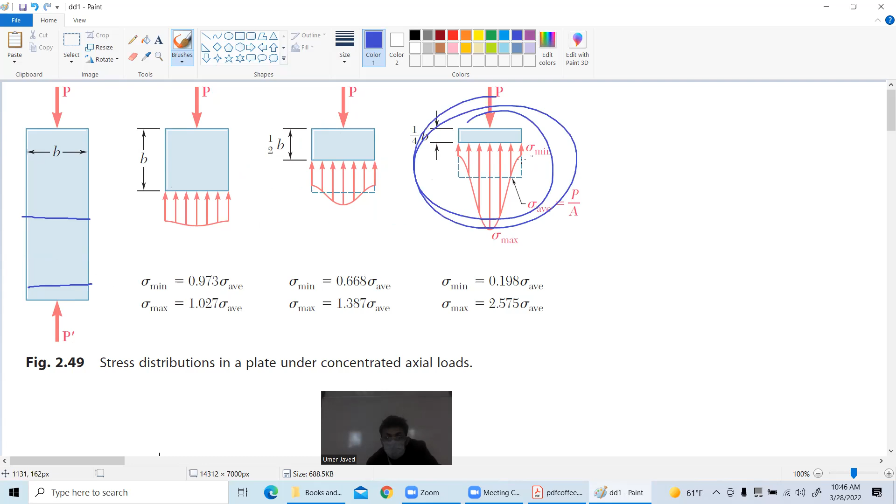Okay, what if I make a cut here? The same behavior as this starts to appear, because again you're near to the load. What happens if I make a cut here? Yeah, of course this behavior appears, because again you are very near to the load. And what happens if I make a cut here? Again this behavior starts to appear. This means you cannot just say every stress is equal to P by A and finish the story. No, you're talking about that when you are way away from the point of application of load.

This story was told to us by this gentleman, Saint Venant, back in the 1700s. Yes, that's the French pronunciation, which I am not very good at. Saint Venant. Did I say it right?

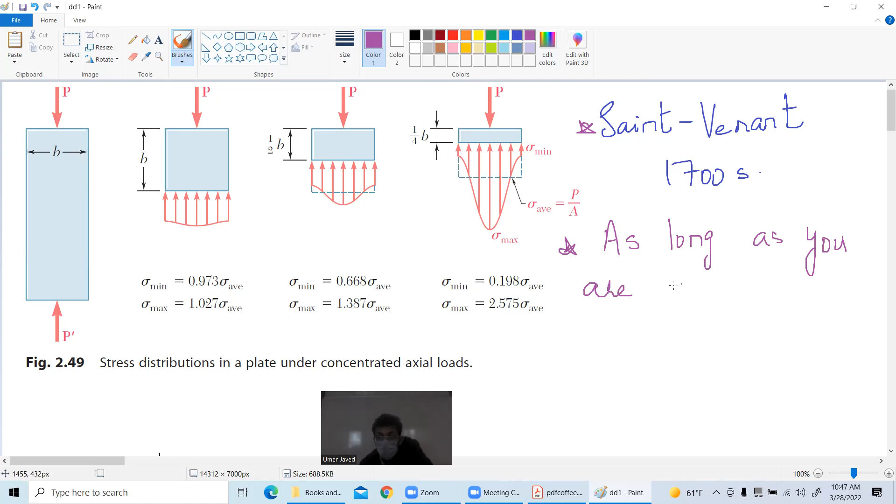Almost, okay. Anyways, so this gentleman told us this story that average stress is equal to P by A, and all of this is true when you are way away from the point of application of load. In fact, as long as we are away from the point of application of force, or change of area or material, life is good. Average stress is equal to P by A. Life is beautiful.

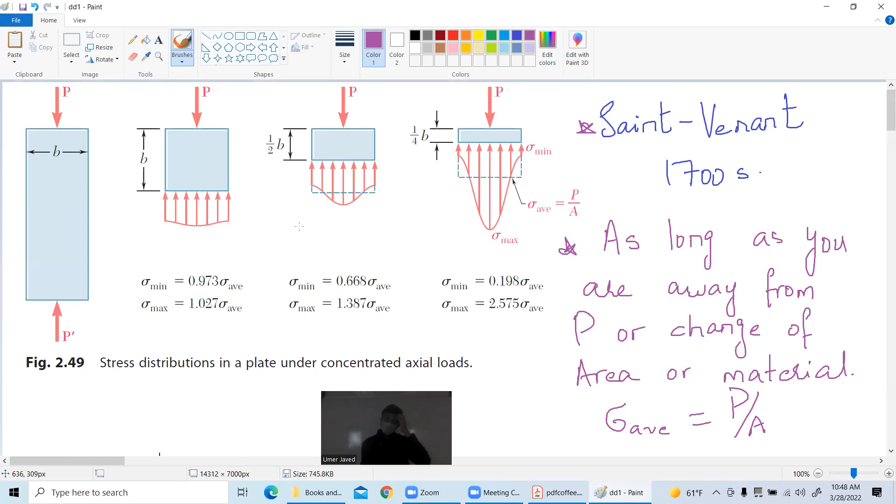You know why? Because the stress is actually way higher than what you were predicting. So if you're talking about a structure with a hole, you need to be careful. Your immediate question will be: so why don't you tell us what the stress actually is? If this gives me a wrong estimate, what should I do when talking about stress in this zone?

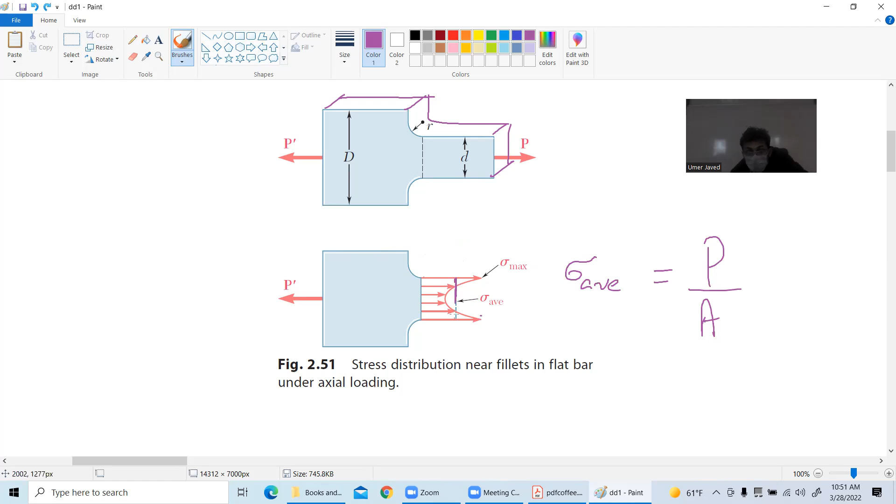And even if you were predicting that the average stress at this section will be P by A, and were feeling very happy, your structure can technically fail. You did not know that this is predicting only the average stress, where individual stress lines actually exceed that prediction. Are you following me? Sure, okay good.

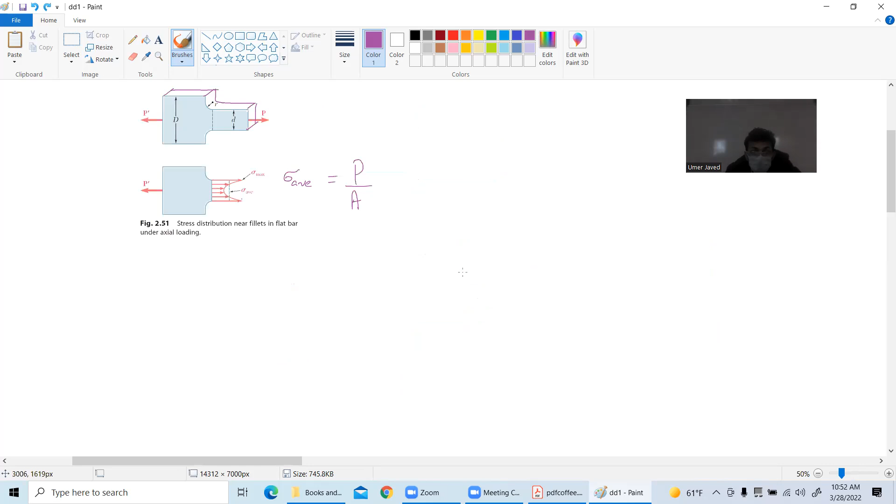Do I have any more diagrams for you, by the way? Oh, I don't, that's not good. So this is not good, no more diagrams for you. Give me one second please, let me make one more. I really want to add one more nice story to the picture, and that is, hang on for a second.

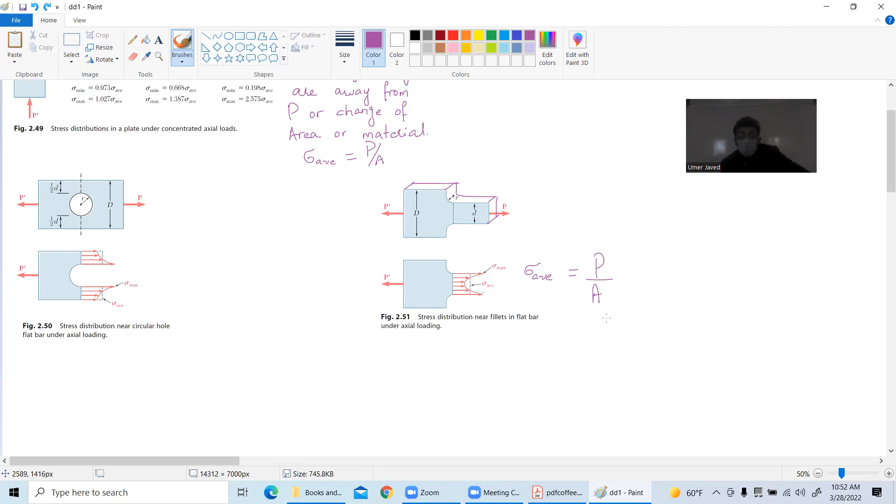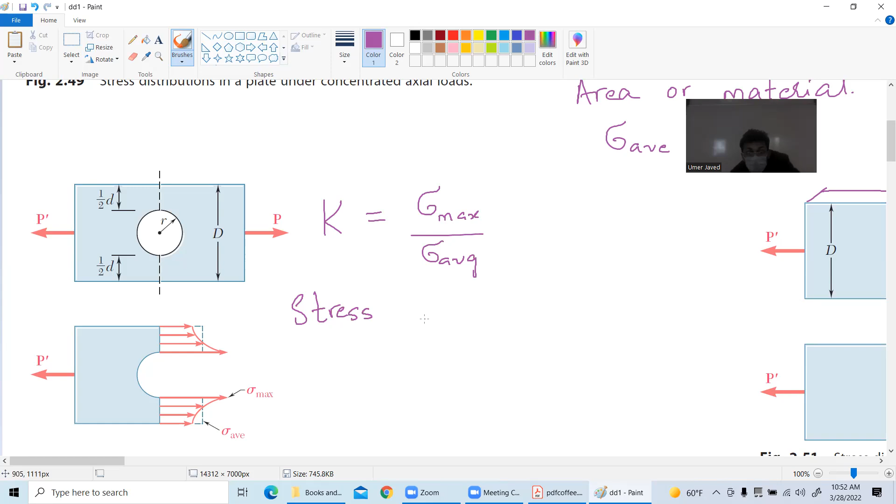Okay, anyways. Now what is the answer to all of this? Let me zoom in a little bit. The answer is K equal to stress max over stress average. This is our stress concentration factor. In fact, I'm using the word concentration, why don't I try to tell you one thing?

You need to give me one minute. So you can assume it like this: you had nice and beautiful stress lines, or stress flow lines if you want to call it, and all of them squeezed in through this little space. So they are being concentrated through that little area. Hence the term stress concentration factor.

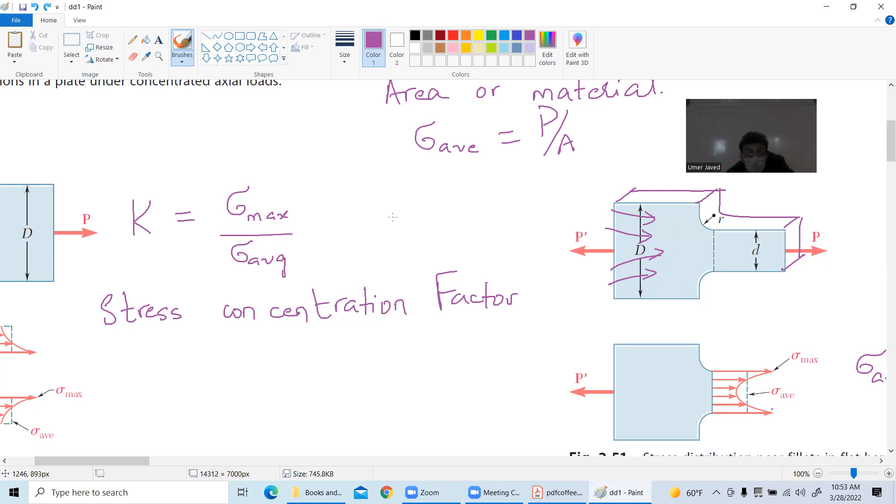So let me tell you how we would proceed. What we will do is use some already present charts that are present in our textbooks. Now, usually such charts are empirical, that is experimental. You have a flat bar like this, and you have a hole here, and you are putting a load here.

What you will be doing is using the same formula: K is equal to stress max over stress average. Stress average, you already know — you've been doing the drill for the last 3 weeks. Average stress is equal to force per unit area. That's the easy part. But now we cannot proceed any further because you actually don't know how the individual stress lines are behaving as they go past or close to that hole, right?

Empirically, you have this line. This is what you will be doing: you will open the required chart. You will look at this 2r over d, right? You have the radius of the hole. You have dia of — I'm sorry, d means this dimension.

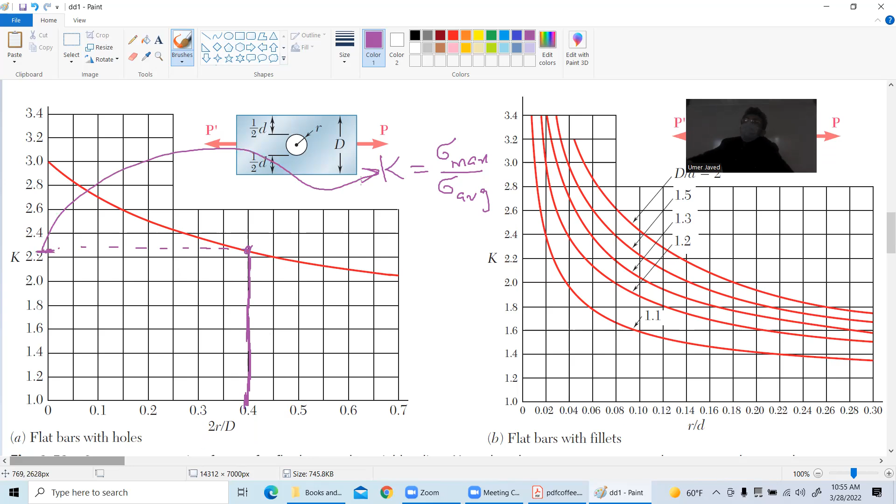So you can think of it like this. Hang on, you have this flat plate and a wooden object that goes right through it, and I am holding that wooden piece and pulling this object. Are you getting my point? So I have this wooden piece, let's say this is my rectangular structure. This is the hole. Somebody placed a wooden piece through it, and now I'm pulling it.

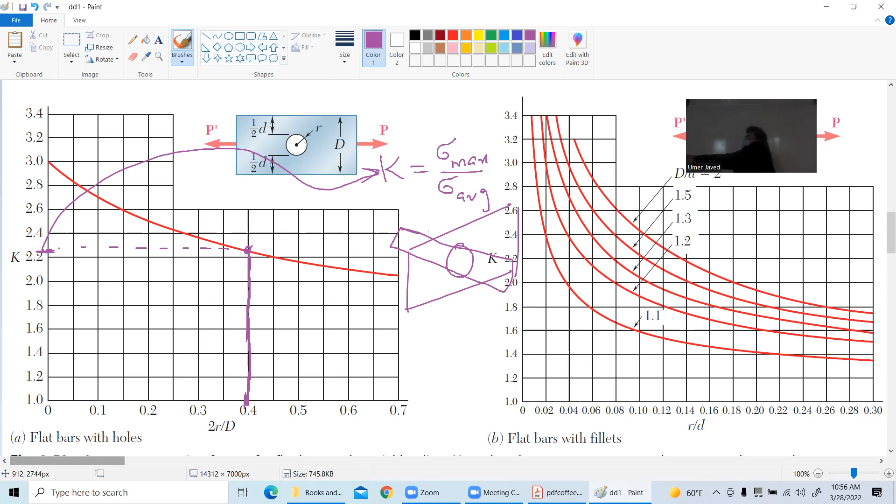So now the fact that this wooden piece goes through the hole, and you have a hole in the structure, that adds to the picture of this stress story. So I have to be using this drawing. I will be doing an example.

Just give me a few more seconds.

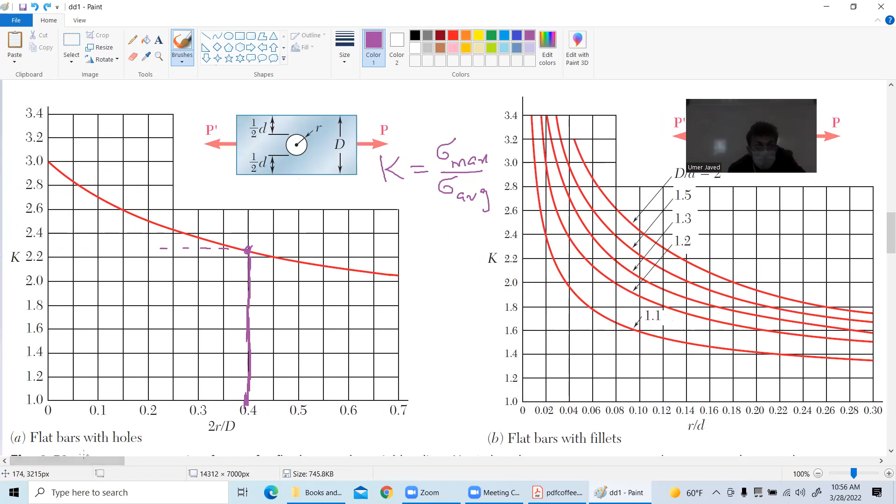Similarly, you have another of these diagrams. This one is again for an object in which you have area that is changing.

Now many students are asking, what about this fillet radius? We know from childhood experience that if you have a piece of paper with a sharp corner, a little force will immediately tear it apart. But if you have a nice radius to the same piece of paper, you'll need a little more force. So this fillet radius actually adds to the complete picture.

You will find r over d, you get your particular value, then you have capital D over small d. Let's say that value is 1.5. You will follow the second curve and arrive here, then go horizontal, and it will give you a beautiful value of K. You substitute here, this you already know, and you calculate stress max. So this is the procedure we will follow in this class.

I will be making an example. If you have any questions, you need to stop me now.

If I'm close to the point of application of load, I need to be careful. The individual stress line will be higher than the average I used to talk about. If there is an area that is changing, I need to be careful. The individual stress line will be higher than the average stress I used to talk about. If the material is changing, I have to be careful.

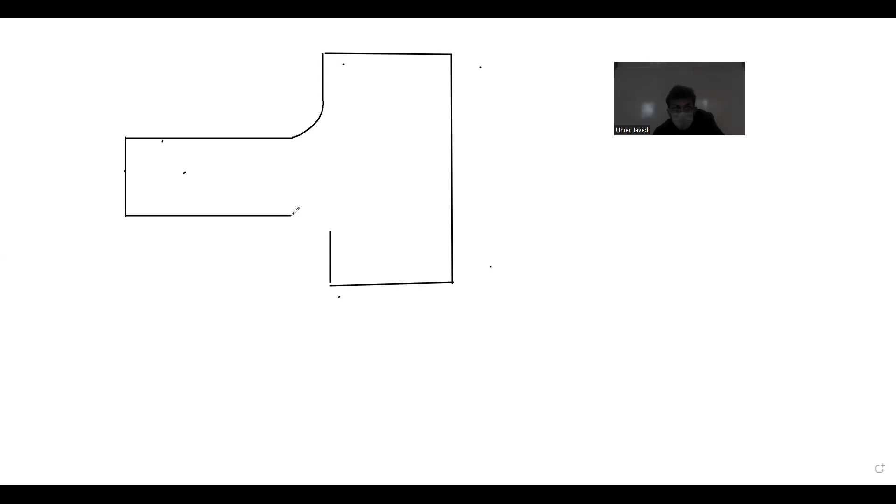Are they involved in the book? Oh, these charts are available in the book. I actually copied them from Beer Johnston. In fact, I can show you right now after a few minutes.

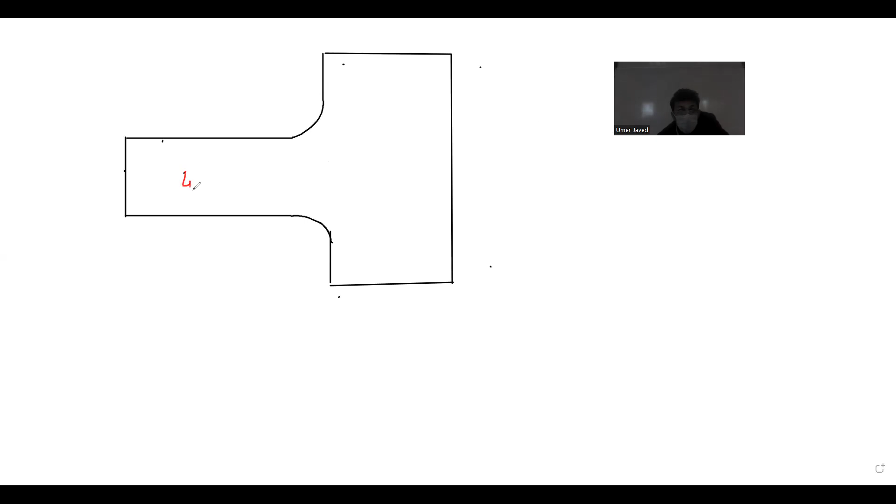Okay, the question says that this nice dimension is 40 millimeter. Beautiful. Okay, life is good. This dimension is 60 millimeter.

And you're definitely doing it. This dimension is 8 millimeter. Nice, the radius.

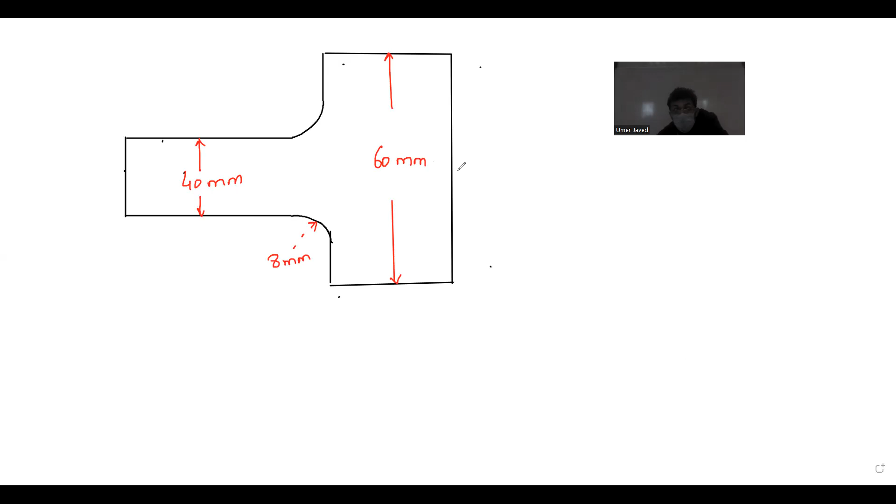The question says that I have a load being applied in this direction, P. Of course, my statics tells me that you are holding it from here or putting a load, whatever. So this should be P.

The question goes and says that you have a depth of 10 millimeter. Wow, 10 millimeter, right or wrong? How many agree, how many disagree? The question says that you have to tell me.

Okay, now I think I have to redraw. I think the load is being applied here. This is a 3-dimensional drawing. Define, okay.

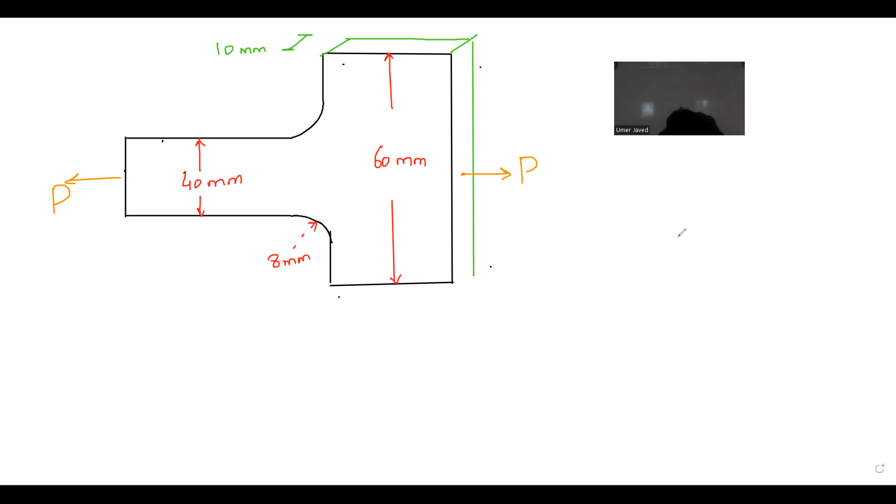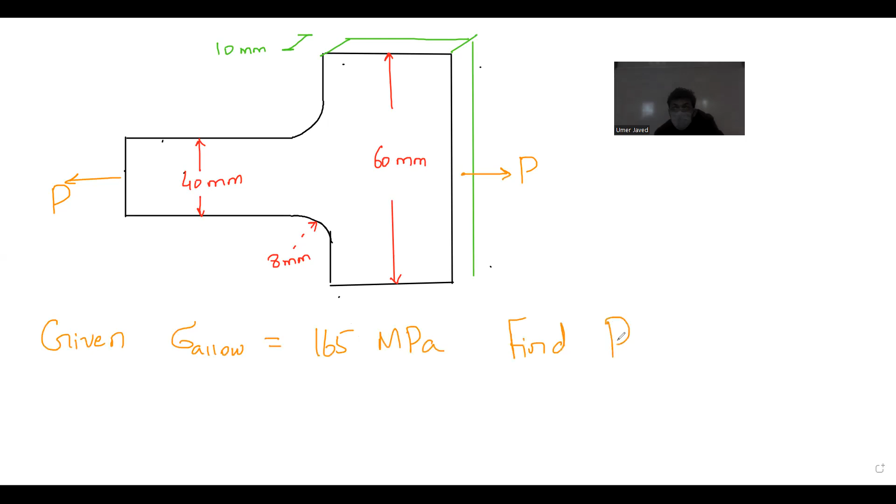Given that the allowable stress is 165 megapascals, you need to tell me P. Okay, hang on for a second. Given the allowable stress is 165 megapascals, then you have to give me the P, the load.

Now you have to be a little careful, because the cross-sectional area has changed, right? So you remember those individual stress flow lines? They are the ones that I am worried about. They might exceed that 165 megapascal and your structure might fail.

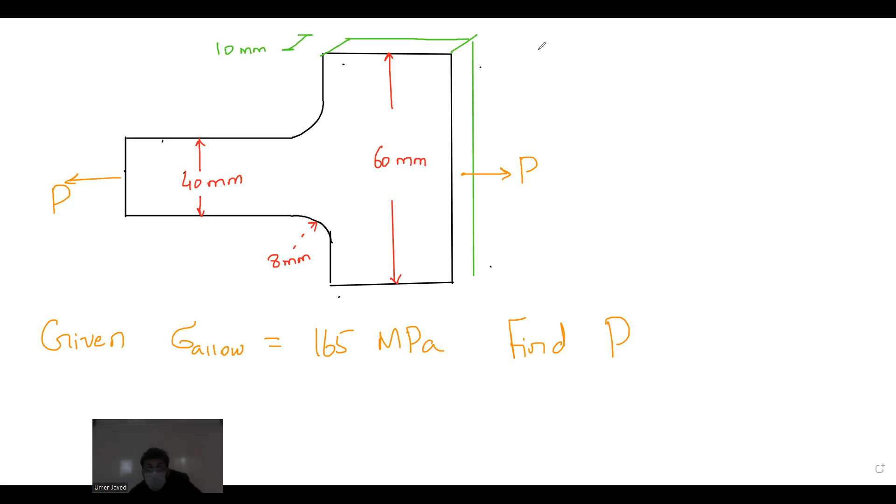So what is the first step if this question shows up in your exam? I will write K equal to stress max over stress average. Second step, stress average equal to P by area.

And by the way, I have to be a little careful. Please don't lose sight of the fact that what is this dimension? 10, right? Are you getting my point? Just because I did not draw does not mean that it's not there. So it's like 10 millimeter, 10 millimeter.

Third, give me the K from the chart. Fourth, give me the stress max. Okay, you can take 60 seconds. Just take a picture of this as soon as possible so that I open the paint chart and everyone of our online students and in class can.

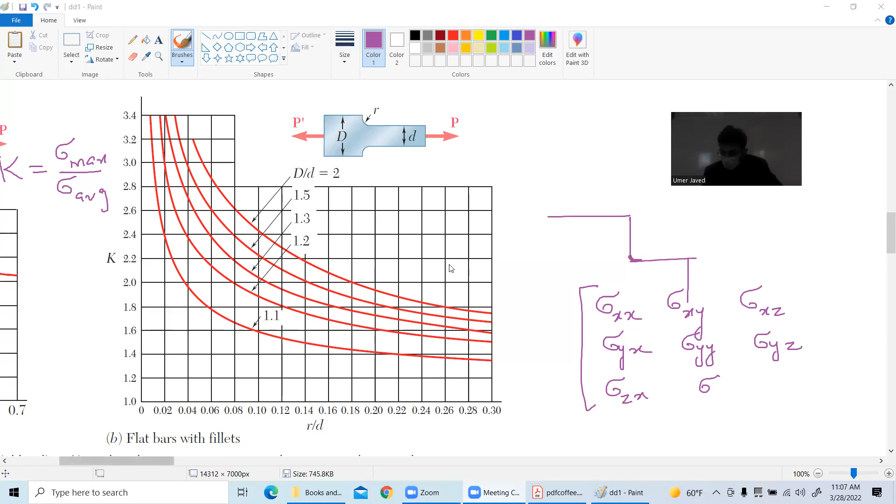Okay, I will go back actually. 6, 5, 4, 3, 2, 1. First thing is, why don't you tell me average stress?

Anyone who found the value? Did I give you the value of P? Oh sorry, okay. So it is P divided by, so what is the area?

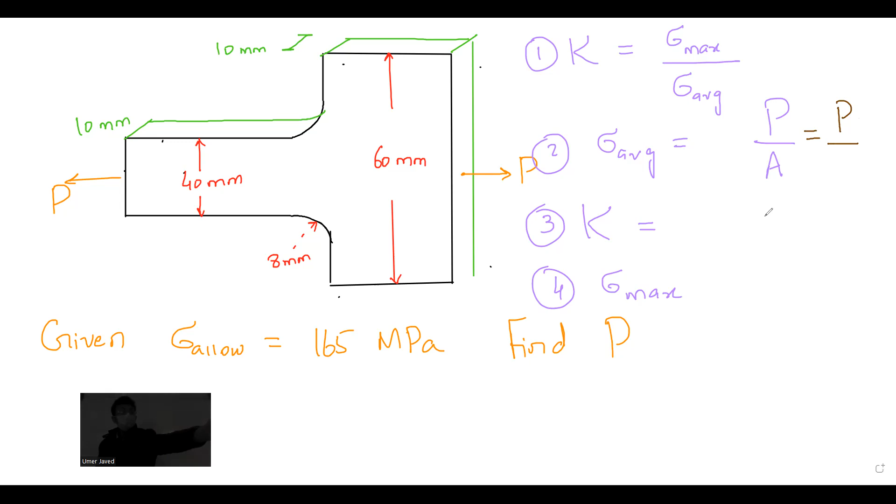Exactly, so you have to tell me which area. Allowable stress means what? Allowable? So allowable stress equal to 165 megapascal means that if the allowable stress exceeds 165, then the structure can get into danger. And for me, this allowable also holds true for the individual stress line.

So if there is one line that is exceeding 165 megapascal, doesn't matter, that's basically maximum stress, right? Exactly, so my maximum line should not cross 165. So the average will be allowable stress, right? Average stress, because we are talking about...

No, I will tell you. So I will have average stress is equal to P by A. And this is equal to stress max over K, right?

Okay, now the area is, what is area? Area will be this one, 10 millimeter by 40 millimeter. So I have stress average is equal to P by A, with area equal to 40 into 10 power minus 3, into 10 power minus 3.

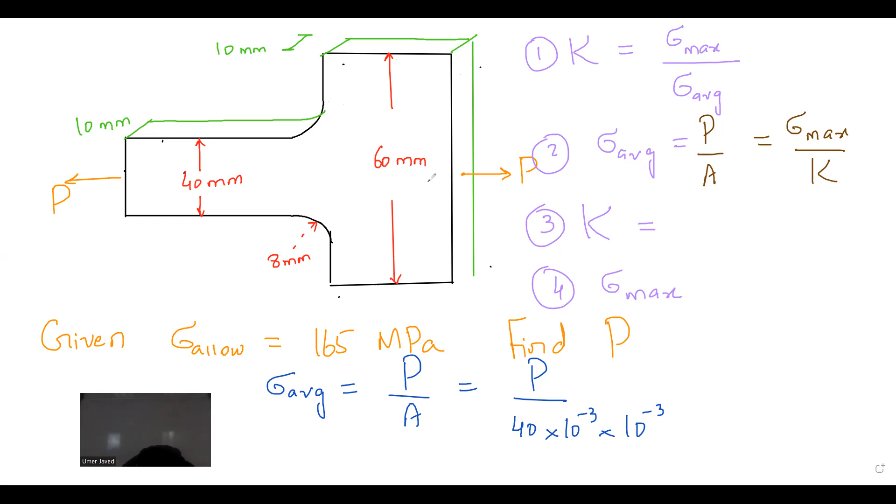For example, right now, if I remember correctly, did I even tell you? Okay, right now you make a cut here or you make a cut here, either way you are very close to this fellow, right? What I'm saying is, if you are close to this and you want to find the stress concentration factor, if you are talking about the average stress, it doesn't matter, as long as you're close to this. If you have to find the average stress and have to use stress concentration factor, go for the smaller area, not the bigger area.

Otherwise, it will kill the purpose of the analysis. I have to be safe in making the structure.

Now I will find the K. In order to find K, I will go back and see what it says: R over D. The R is the fillet radius and D is the width of this little fellow. So give me R over D.

R over D is... somebody already did that, 8 into 10 power minus 3 meter over smaller dimension, 40 into 10 power minus 3. You said 0.2? Seems correct to me. Let's see, okay.

The next thing I need to know is capital D over small d. This is capital D, this is small d. So I will go back and do capital D over small d.

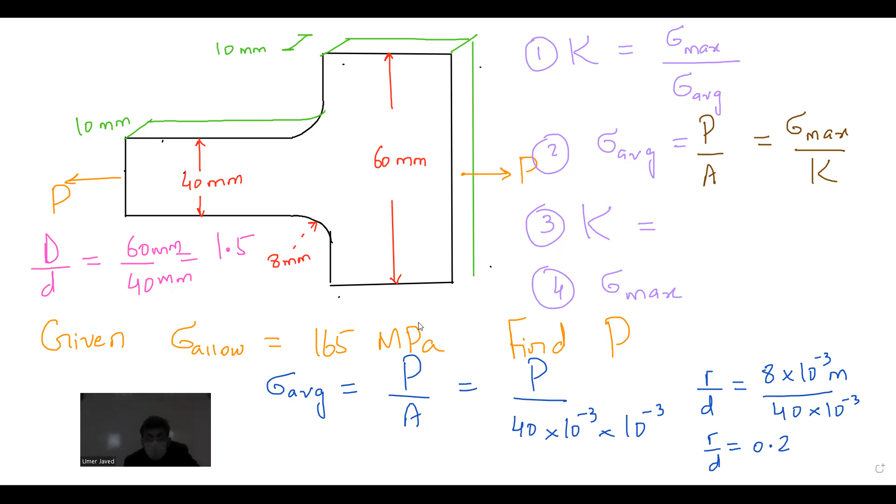Okay, just remember these things: 0.2 and 1.5. Okay, so 0.2, I will open this blue line, 0.2, R over D was that, right?

So here goes the shift, nice and beautiful. Then 1.5, this line is my 1.5. You already did that? 1.5, sorry, yes, this one, hang on.

Now I will make a cut here. Yes, this is the yellow spot. Then I will go from here and make a purple line. Boom. What did you say? 1.8?

Oh, I think I made a mistake. Why do I have 1.73 in my notes then? Well, that's not good. I don't know why. 1.73.

Did I make a mistake? We have to... okay, I have made a mistake, let's say. Let's go back. That's not good.

60 over 40 is 1.5. R over d is 0.2. R over D is 0.2. So 1.5 and 0.2, let's do it one more time. This is 0.2, this is 1.5.

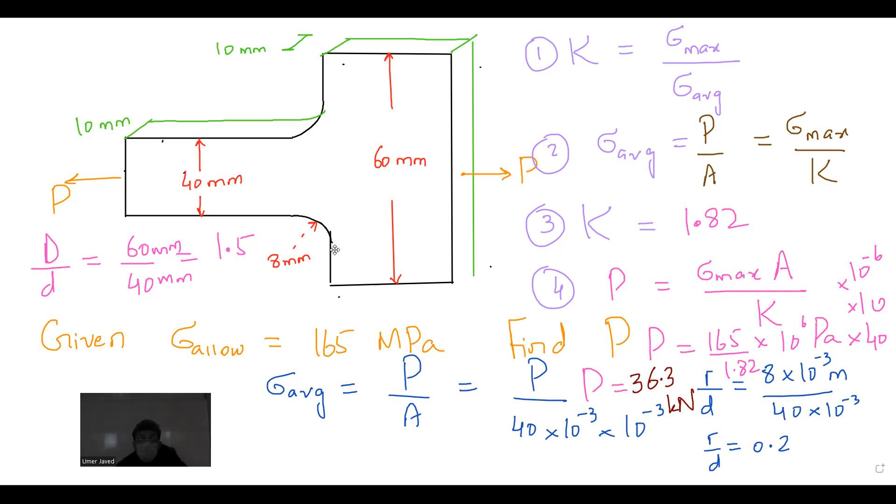So let me write the comment of one of the students. Stress allowable in this problem is your stress max, as one of the students already mentioned in the beginning. Thank you.

Okay, left and right, but we are able to solve this. Yes, we have a question. Yes, so stress max is like the...

Stress max is the individual stress line that goes way beyond the average stress that I have been predicting using that simple average stress, because the individual stress lines are not equal in magnitude, which is completely wrong. Because for this structure, the maximum stress is like this. Please give me 1 second.

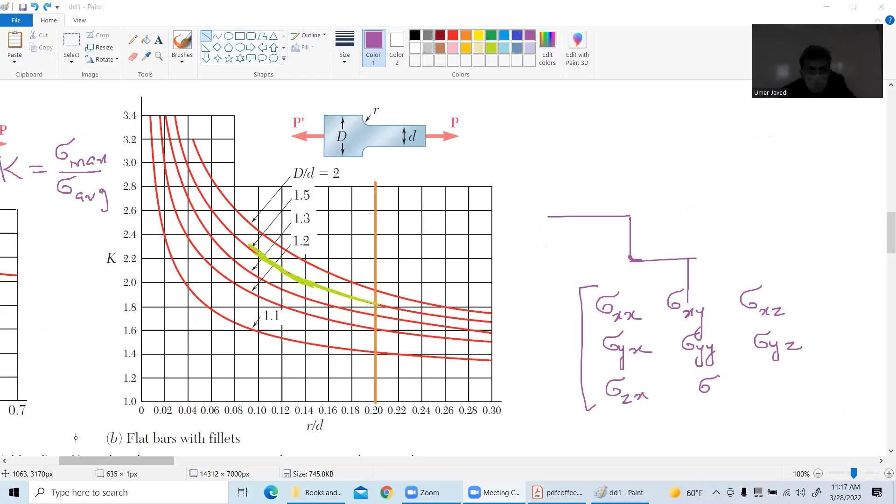We have a question. I showed you this one. Where is it? Sorry, right, yeah, this one. So this is your stress max, this line. Right? And that's why this is also my allowable. If I keep this thing as my allowable, then my structure will fail because this is not allowable. This is the allowable.

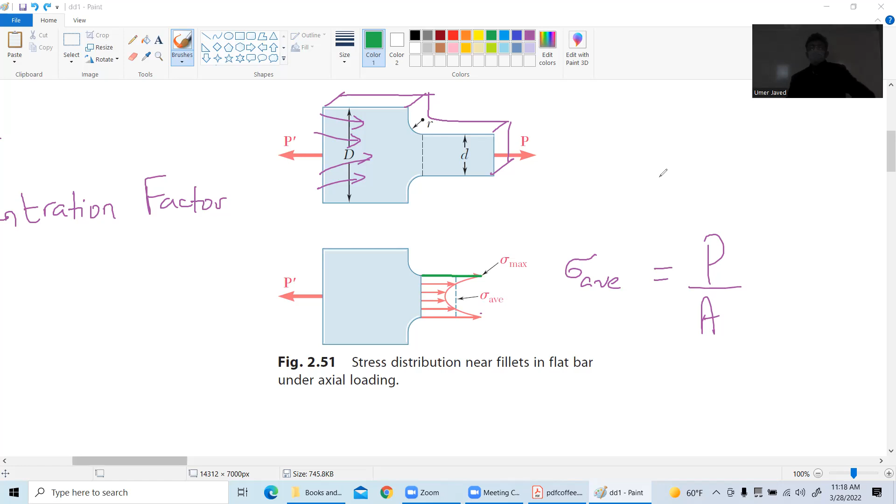Okay, we're stopping here for 30 seconds. Is it clear? Yes. So the graph example for the K, does it always vary depending on the object that we're studying on? Okay, so what about the graphs?

Well, the graphs are different for different geometries. If you have a rectangular plate with a hole, you have a certain empirical plot for that. If you have an object like this that has a variation in width, you have a certain plot.

If you have a completely different kind of formation, let's say, let me give you an example, two holes that are very close to each other - I'm just coming up with an example myself - then you definitely need experimental results for that one as well. But these are some generally used plates and structures that you observe in your daily life.

As I told you, have a plate, have a hole, put a wooden stick through it and try to pull it. Of course, the structure can fail because you are pulling it right through that hole using that wooden stick. So you will be using that other plot that I showed you.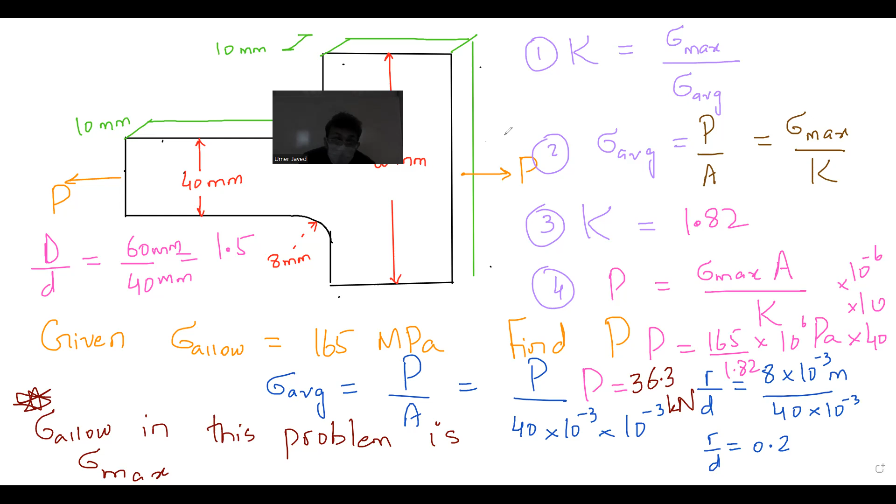You will see a homework on this one as well. So why don't you do this problem? By the way, last time I gave you that one problem. Did you do that problem? Did you do that? No.

Okay, we can. I can give you the answer for that one. I need to actually see that problem. So let me share the screen. That problem was...

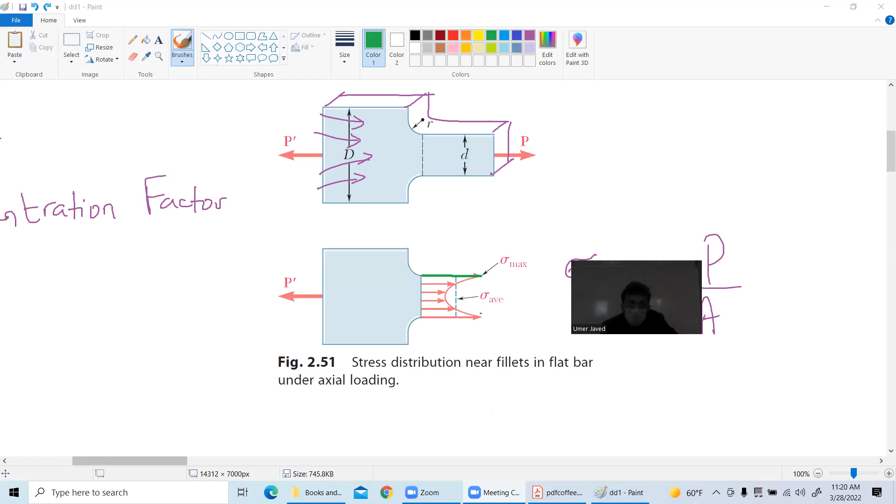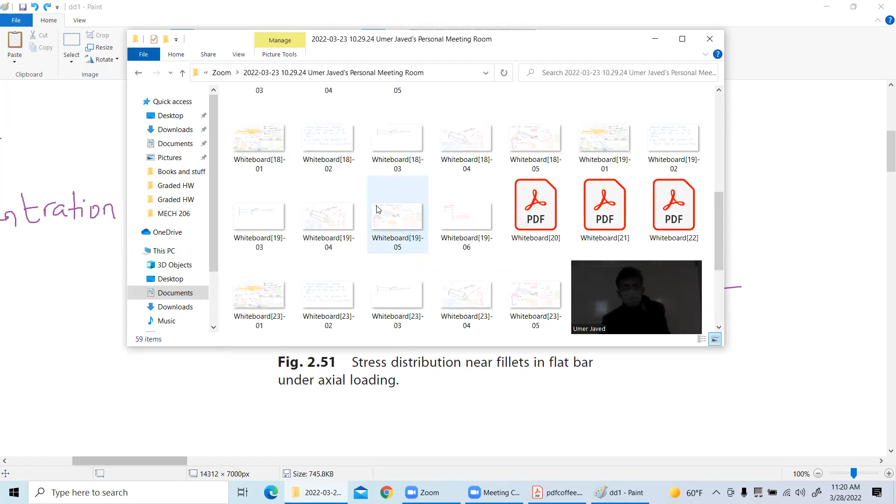We already are past 11:20 now. Time just... okay, when was that class? 24... 23, I think. 23, okay.

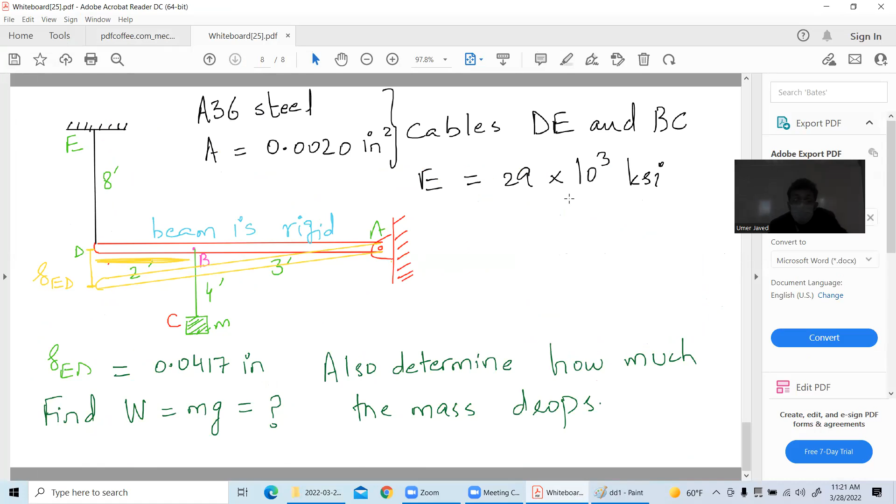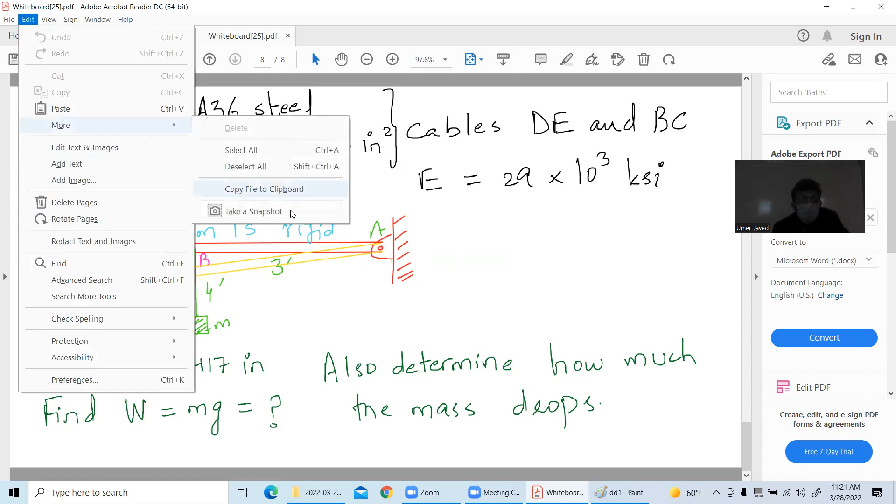So should we do this problem? I think we should. So let me go for more. There's tools. How do we take a picture? Okay, let me do it, please. I gave you this problem. I wanted you to do this.

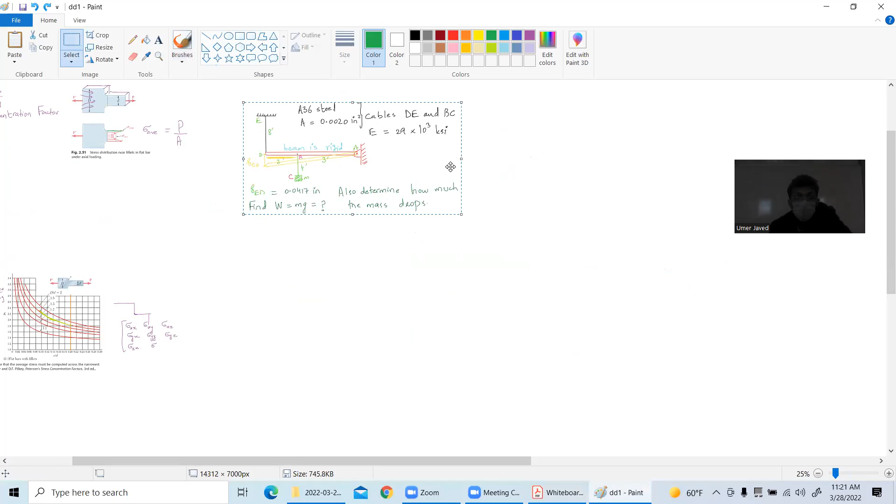Copy selected graphic. Okay, so let's do this quickly. The first thing I will do in this problem is the first step: change in ED equal to PL over EA. Oh sorry, PL over EA. Elastic modulus is given to me. The area is given to me for this.

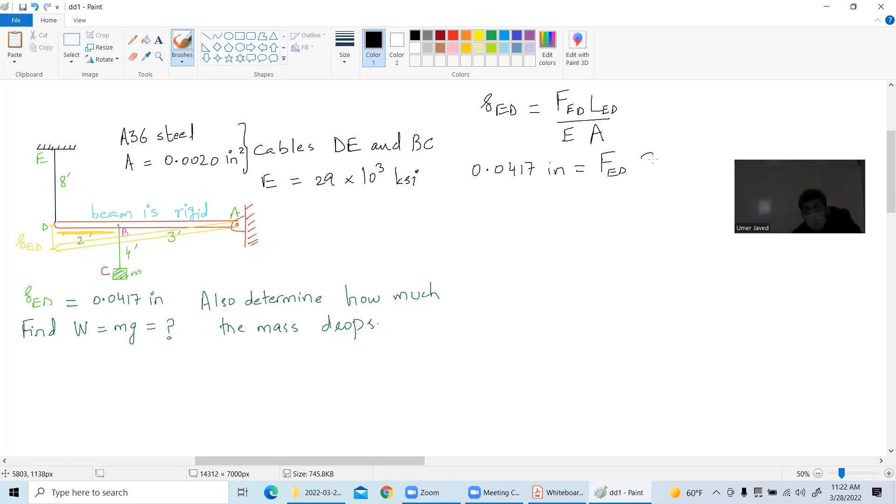Now, the change in length. Did they give me delta ED? Yes, they did. So from here, I will have 0.0417 inches equal to FED. LED is given to me as - give me the dimension quickly - LED is 8 feet, multiply by 12 inches, divided by elastic modulus is 29 times 10 power 3 KSI, into the area is given to me as 0.002 inch square. So students who don't like this, they need to take a decision quickly.

So we have inch - double prime means inches, and single prime means feet. Yes, very good. So give me FED quickly. By the way, you should have tried this. You did not? Anyways, that's not good. Sorry. FED is...

Anyone who is using, okay he's using - how much? 0.025.

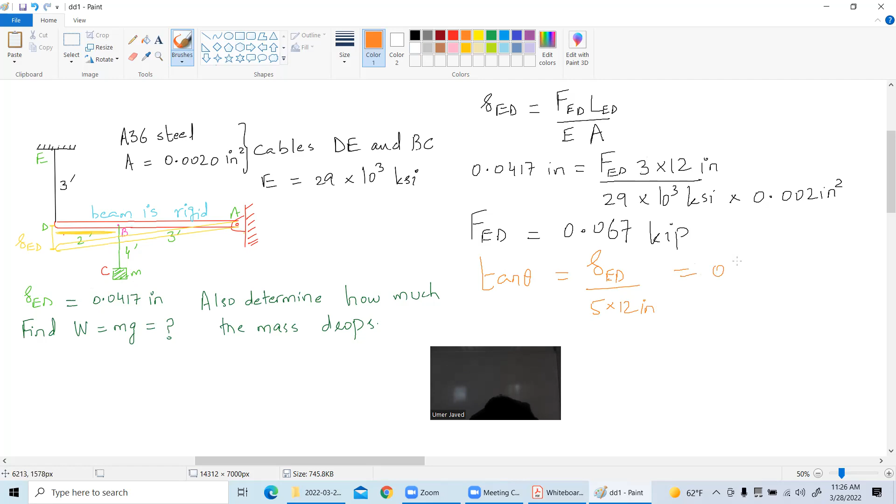Right, which is my 0.025 inches, because in the question statement I already told you that delta YB was 0.025 inches. I think this was given.

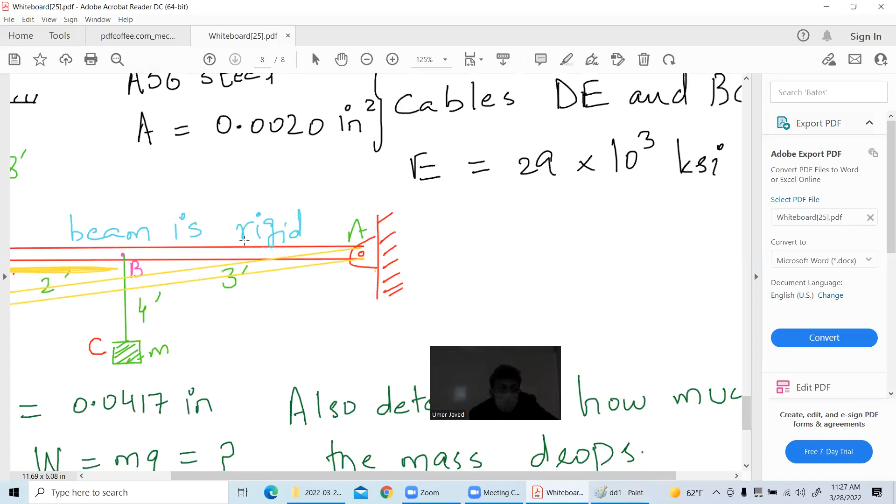Okay, I think we will have to do this problem next time. It's okay, let me open - what was the problem that I gave you? Hang on. Okay, this was given and I have to find - okay sorry, you are right actually.

We have to use similar triangles first. So this is unknown - delta ED you have found, which is equal to 0.0417. And this one is 5 divided by 12, so 5 multiplied by 12. It is equal to - now I will be using the similar triangles, perpendicular over base. Now this is what is unknown to me, how much it drops, delta YB, divided by 3 feet. Clear? Okay, now I will have this ratio.

Why don't you give me delta YB, please?

So this is 0.025 inches. Now that I have got this, the question asks how much this mass drops. So tell me, how much does this mass drop? Anyone?

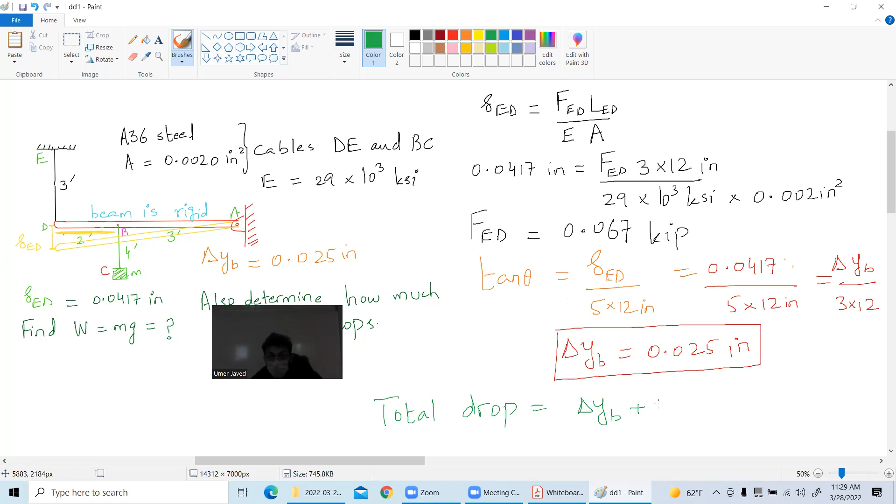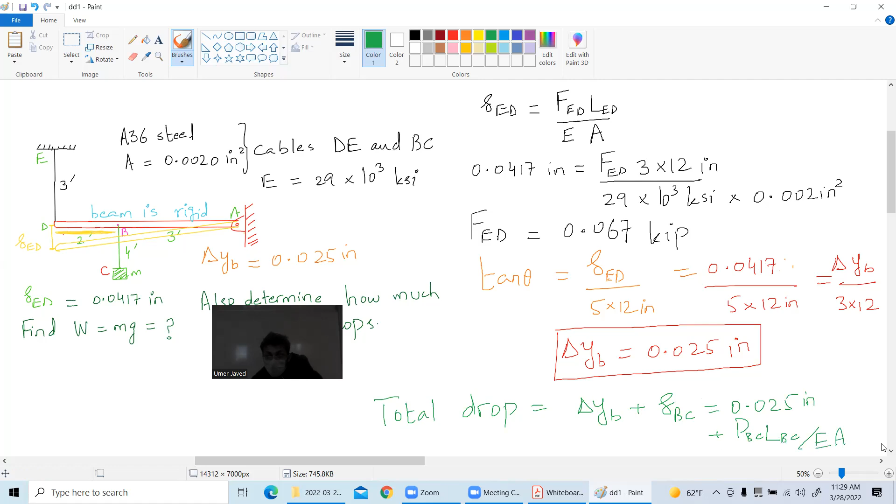This plus total drop equal to this plus the change in length that happens in this metallic rod itself, which will be delta BC. So it will be equal to 0.025 inches plus PL over EA. So tell me the answer. What is PL over EA? Plus 0.025?

Yeah, we need to find, thank you. Now we need to find the weight. You cannot proceed in this problem. Very nice, so thank you. So what I will be doing is I will be making a free body diagram.

Okay. What happened? You can ask me. Okay, so this is my complete rod. This is my FED, hang in there with me please, FED. And this is my weight that is acting. And this is the AX. And let's say I am using the vertical for AY.

And the question is done. All you have to do is take summation of moments. So you will come up with, let's say, minus FED into 5 feet into 12 inches, plus the weight, which is unknown, into 3 feet into 12 inches equal to 0.

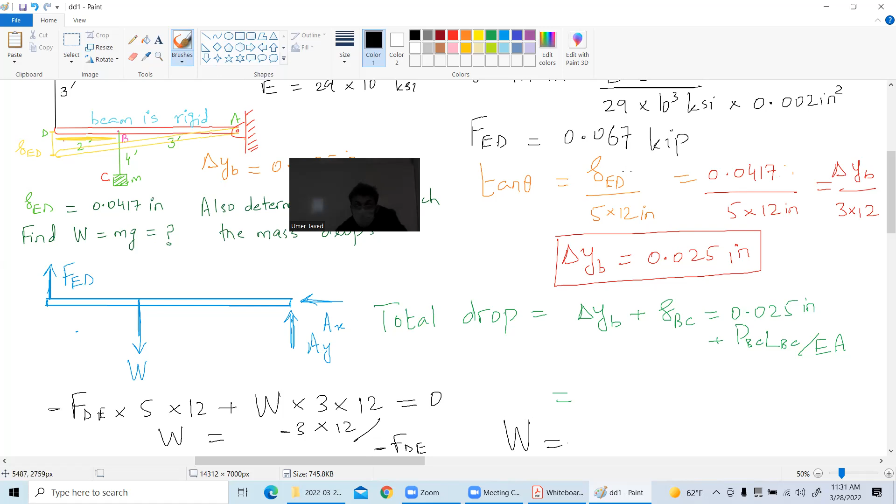Sure, yes, the tension. So W comes out to be this one, right? So it comes out to be this one, W is equal to minus 3 into 12. Oh sorry, oh sorry, I think I wanted to say 5 divided by. I'm taking more time on this one, by the way.

Why don't you tell me? Yeah, thank you, it will be 5. Okay, FDE multiply by 5 divided by 3. So W comes out to be 0.067 kilopounds multiplied by 5 divided by 3. So what is the W? In pounds, give me in pounds, multiply with 1,000.

112 pound force. LB, you are allowed to put a small f here for pound force if you want. One of the students gave us the W value, so I will substitute here with the dark blue color, that it is

0.025 inches plus weight is PBC. So it will be 112 multiplied by length, which is how much? 4 feet multiplied by 12. Elastic modulus is 29 into 10 power 3 into 10 power 3 in kilopound per square inch. Okay, you can actually multiply with 1,000 if you want.

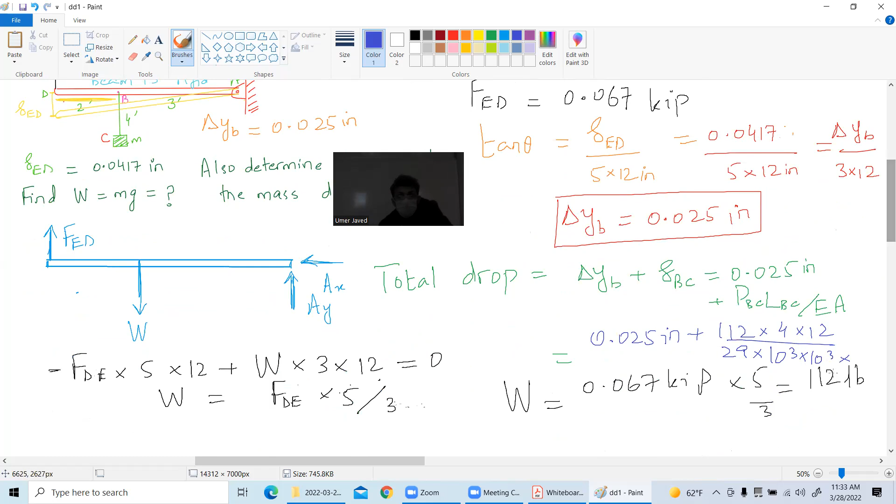Okay, what about area? Area is given to me as, what is the value? 0.002. So it will be 0.002 inch square. So everything is in simple terms, nothing is in kilo. So what is the total drop?

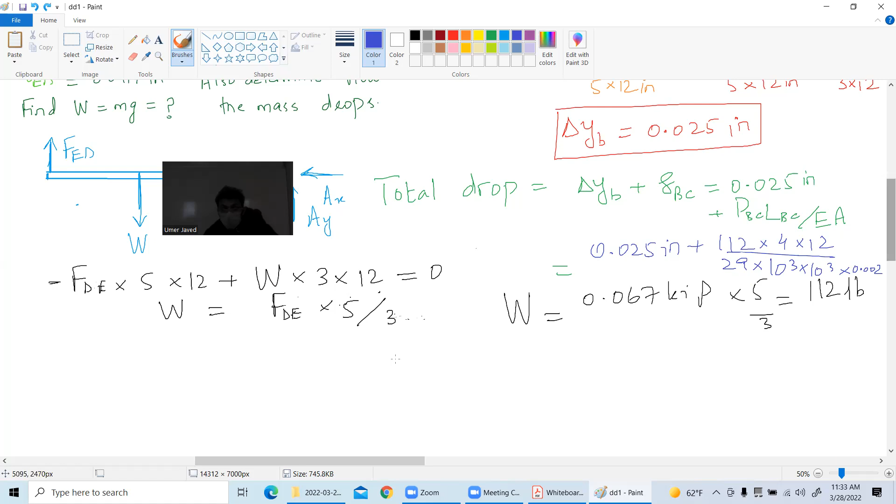0.118 inch. So 112 into 4 into 12 divided by 29 into 10 power 3 into 10 power 3 into 0.002. Okay, did you do this problem the same way?

Did anyone? No? Anyone who did the problem the same way? I did the problem, sir, but the answer was not right because of the code, because the dimension was wrong. Okay, that's fine. Bye bye. Thank you.

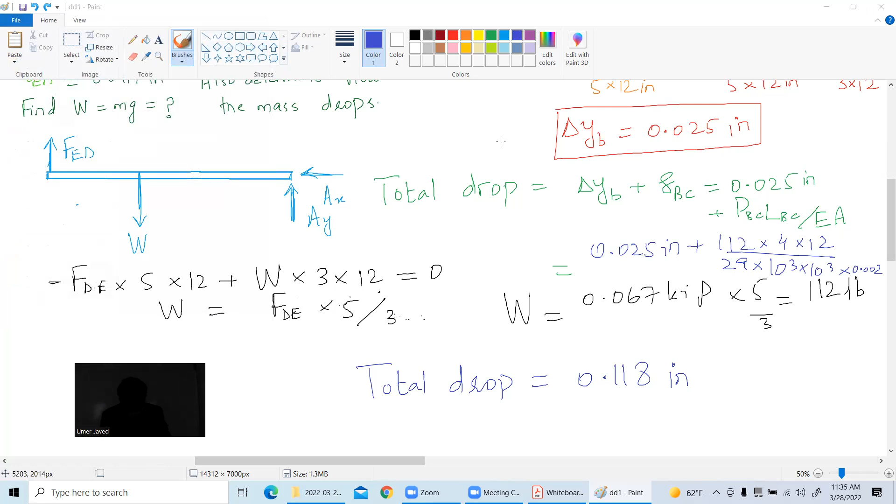Yes, we really went left and right in this problem. Yes. I have a question about the diagram. So firstly, we are trying to find delta y at B.

I will tell you what happens, I will tell you. It goes like this, I will tell you, and after that the cable is also in tension. No, I will tell you. I understand your question. The whole thing is that first of all, this mass is not attached to this one initially. So you have this cable and you have a flat rod. Life is good. Then what you did is you hung this mass with this rod, right? The moment you did that, because of this load, this rod goes like this.

So this rod has now arrived here, and we are like, okay, because of hanging this load. The question is how much this mass drops. Now the point is that this mass, when it has made sure that this rod arrives here, this mass itself does not stop, because it itself has this wire with which it is hanging. So this wire also extends. Yes, so nothing happens to this blue line now. It's just that this mass falls a little more, under the fact that this wire is also stretching. But nothing happens to this fellow, because if you see, this point is attached, for this mass, this point is attached to this.

So it falls, it comes here, but this mass continues its journey also, yeah. You get my point? It also stretches, the wire itself also stretches with which the mass is hanging, because there is a PL over EA in that wire as well.